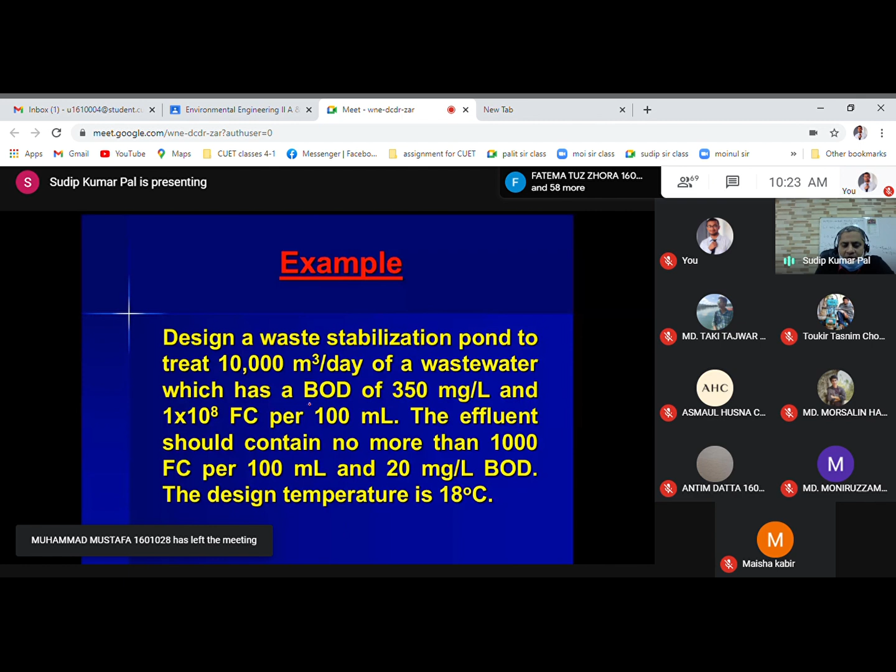And BOD removal is coming as 56%. So we are doing this exercise based on the given data. We are not thinking about the practical aspects, like how many ponds we will design, whether it will be in series or parallel. At this moment in undergraduate study, that may not be necessary.

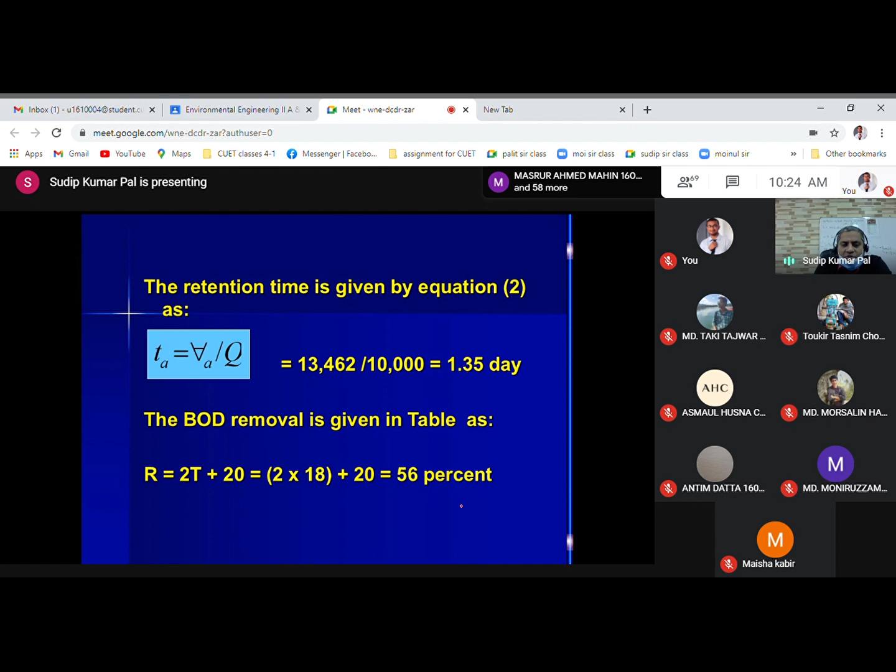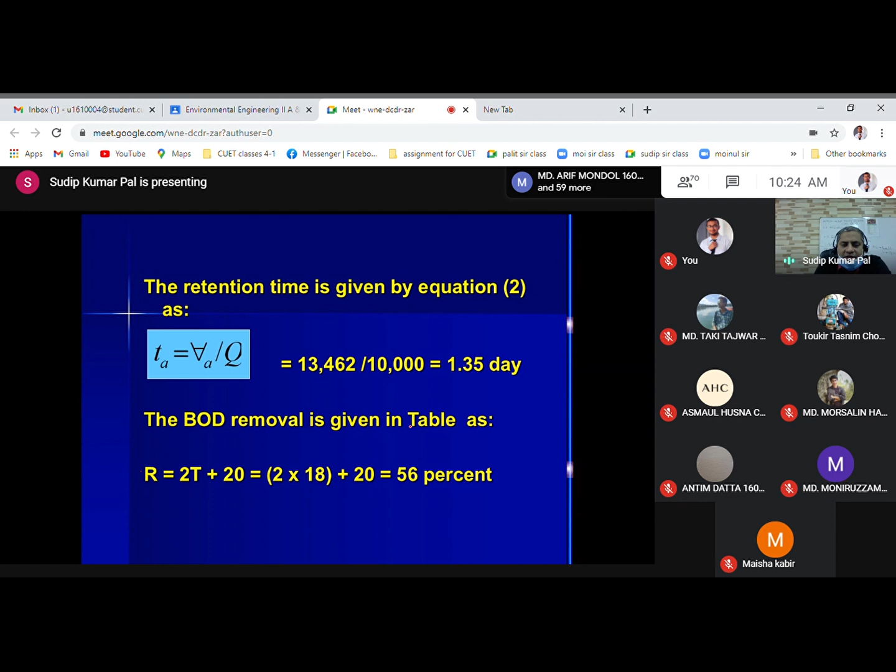We also discussed in class how to solve these issues if the loading rate is high. So as you can see, 56% removal we are expecting theoretically from the pond, and practically, obviously, after construction we have to measure. This is in the design phase, so this 56% is based on the temperature. We assume 18 degrees, the empirical equation proposed by the scientist for designing the waste stabilization pond. So that is the anaerobic pond.

It's nothing really difficult. And for facultative, we move into the second phase. Facultative is basically based on the surface loading. This is also equally based on the temperature. As you can see, the temperature was 18, so based on that, the loading rate is 216 kg per hectare per day.

And this is the equation, as you can see, 10 Li, but as I said, this Li will be whatever is remaining. So 56% is the removal efficiency, then 0.44 is remaining. So this is after anaerobic treatment. So the remaining portion is 0.44 into 350, and Q will be the same as before, 10,000, divided by...

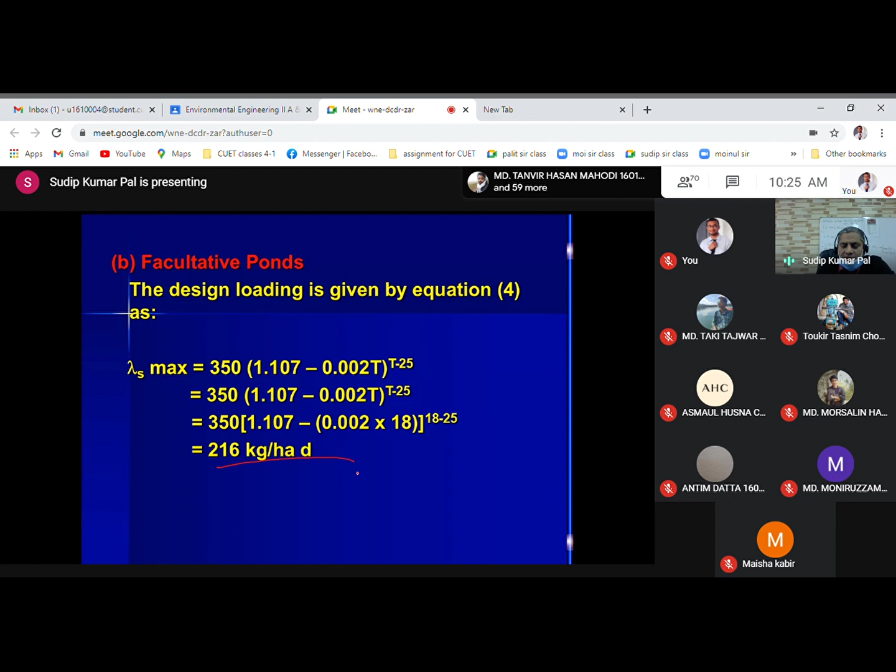Lambda S, as you can see, is based on temperature. You put in the temperature and then calculate this, the surface loading rate. And then from there you can calculate the surface area. And you can see this is a huge surface area, 71,300 square meters.

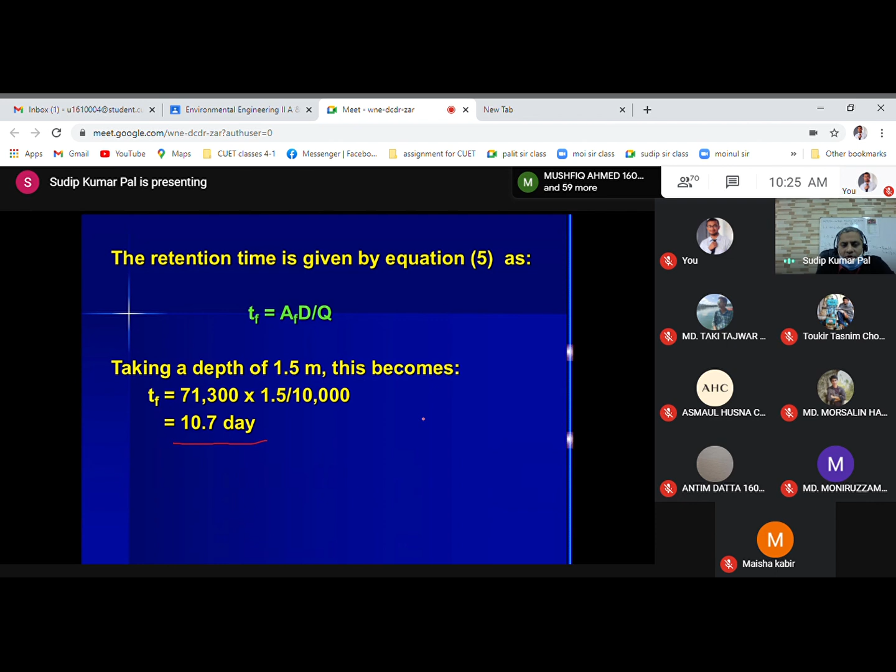And the retention time is almost 10.7 days, or 11 days roughly, you can say, if you assume the depth is 1.5 meters. If you assume even 1 meter, or higher, a smaller or larger retention time will come up.

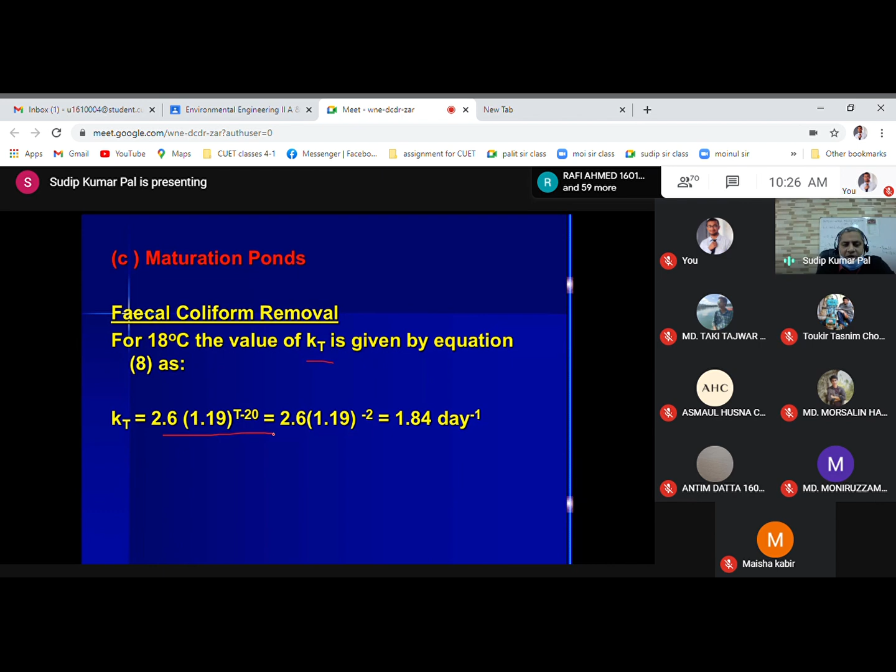Then coming into the maturation pond, as you can see, the maturation pond comes next. And for the maturation pond, obviously KT is important, and KT is also dependent on temperature, as we discussed in the last class. So you calculate the reaction rate, and then there are basically 3 ponds you have. Then what we are basically trying here, we have given 10 to the power 8 as the fecal coliform concentration.

So this is coming from the given data. We have one anaerobic pond, one facultative pond, and then a number of maturation ponds, which we assume as N. In the maturation pond, fecal coliform decay is exponential, that's why it is to the power N, where N is the number of ponds. It can be 1, 2, or 3, depending on your trial, or you can solve the mathematics by setting up the equation and calculating how many are needed.

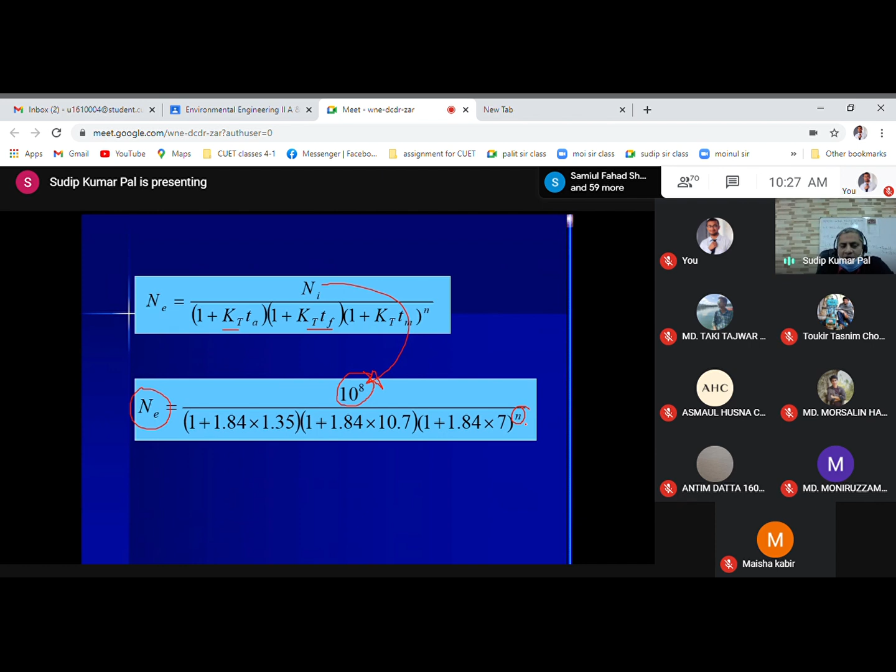Why do we put N? Because we have a requirement: the NE value should be 10 to the power 3 or less. So we can put 10 to the power 3 and calculate the value of N, or we can give a trial.

If we assume the maturation pond, because we already calculated 1.35 days and 10.7 days, there are a few unknowns here: one is the retention time in the maturation pond, and one is the number of maturation ponds we are going to design. So we assume Tm equal to 7. The typical retention time in a maturation pond varies from 7 days to 30 days, depending on the target we are achieving. So it's just an assumption and trial and error, assuming 7 days.

Assume one pond: one anaerobic, then one facultative, then one maturation. With N value equal to 1, the result is 99,957, which is still greater than 1,000, the requirement set by regulation before discharge. If we go to 2 ponds, we get 7,201, still greater than 1,000. If we give 3 ponds, then it is less than 1,000 FC. That means 3 maturation ponds are necessary.

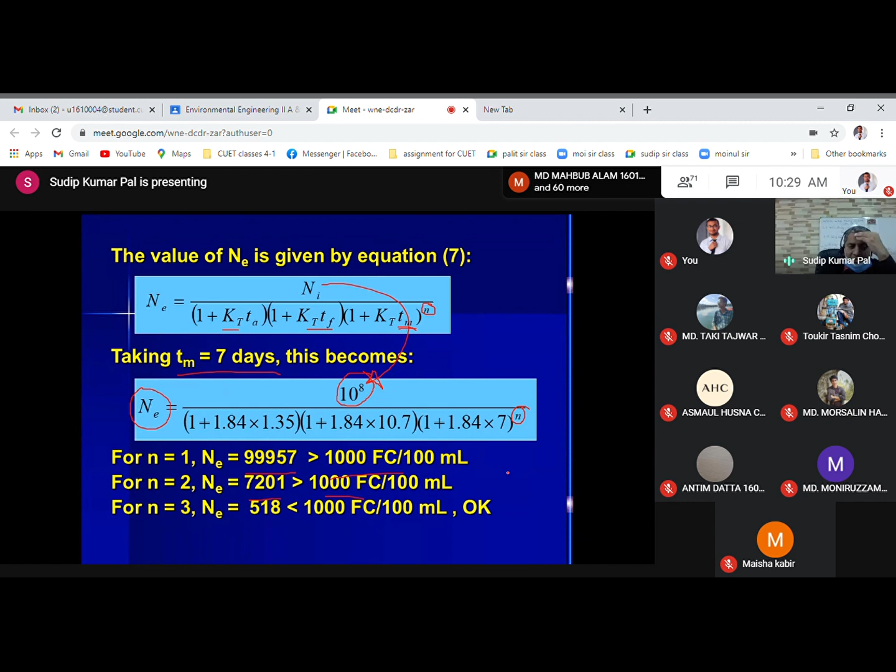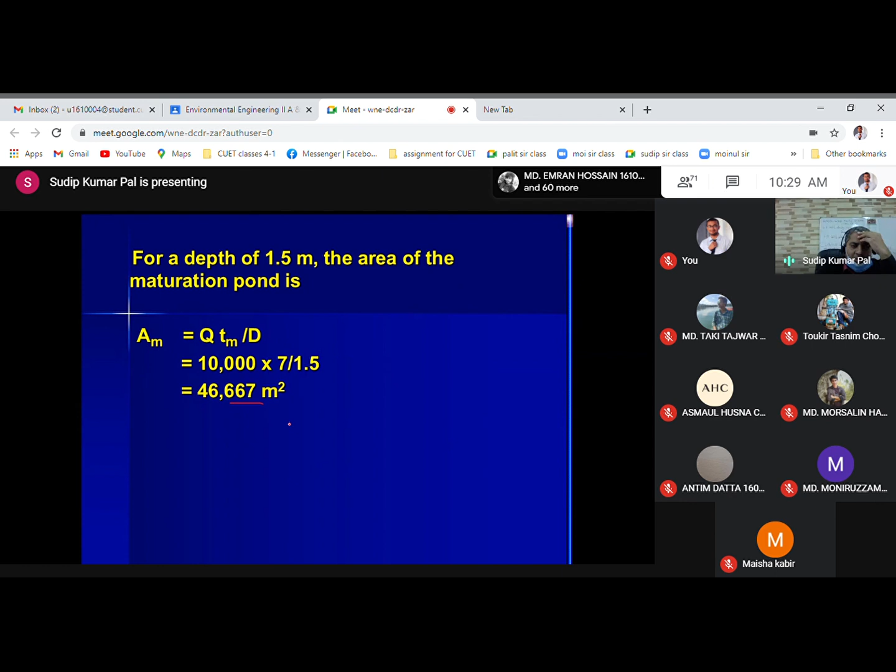Once you come to this decision, you can calculate the area of the maturation pond, because you know the retention time is 7 days, and the depth of the pond is basically 1 to 2 meters. Assuming an average of 1.5 meters, the result is 46,667 square meters of maturation pond necessary.

Then we have to do a final check. We now confirm that after one anaerobic, one facultative pond, if we put 3 maturation ponds, then we are able to reduce the BOD and fecal coliform load within the required range.

After the anaerobic pond, BOD removal gives a concentration of 154 milligram per liter, but our guideline requires BOD concentration to be less than 20. We have to assume this and check whether after anaerobic, facultative, and maturation ponds we can get there. The anaerobic pond gives 56% efficiency, but it's still 154. Then we calculate how much we can remove from the facultative and the 3 maturation ponds we designed, using K1 as the rate coefficient since the temperature is not 20 degrees but 18 degrees, so we need to make the correction.

So 0.3 into 1.05 was the theta value, if you remember from the last class. Theta is 1.05, 0.3 comes from the temperature data, and T is 18. For 20 degrees it is 0.3; if it is not 20 degrees, then it's 0.3 into theta to the power T minus 20. With T equal to 18, this comes out as 0.272 per day.

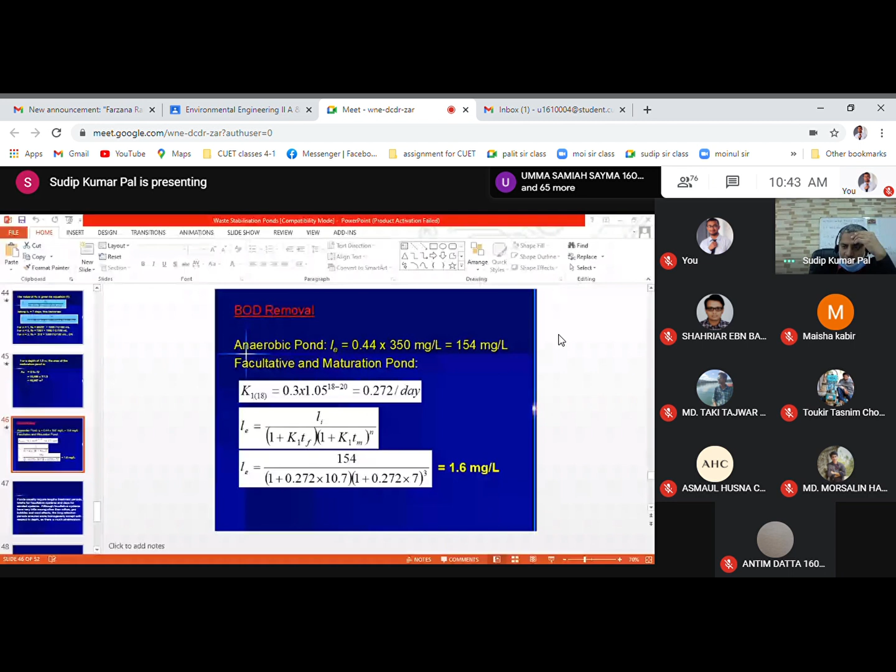So what do you feel are the disadvantages of having this pond system? After solving this exercise, what do you feel? What sort of disadvantages does this pond system have? Sir, it needs a huge space and lots of time.

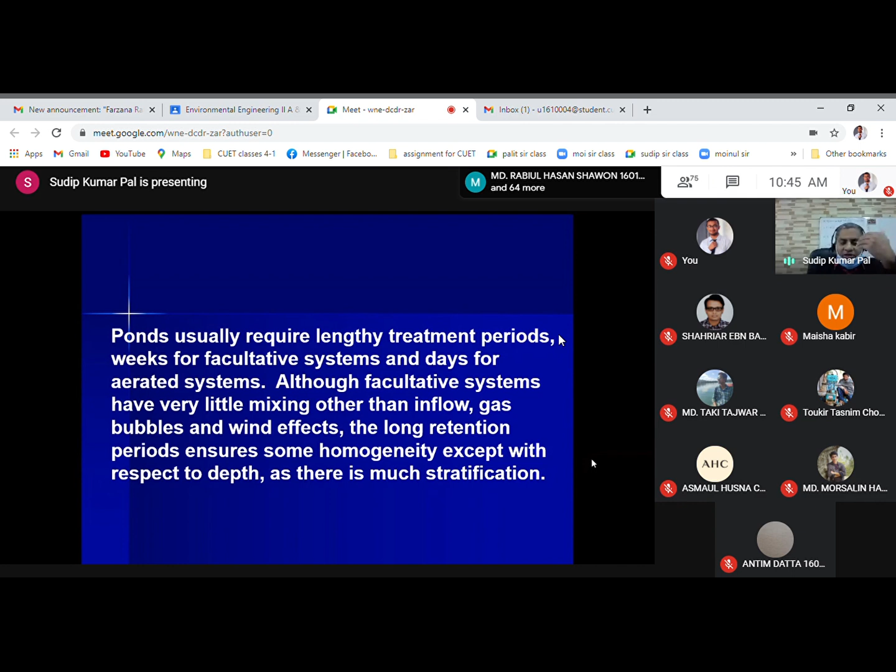As in any mixed system, the contents have the same concentration as the overflow. This means that the organism in the pond continuously experience a low level of substrate to feed on, which slows down the treatment considerably. It varies from one pond to another because it depends on the bacteria, and bacteria needs food.

If organic matter concentration goes down, that means BOD goes down. And if BOD goes down, that means there is not enough food for your bacteria to survive. So sometimes without food, bacteria cannot grow.

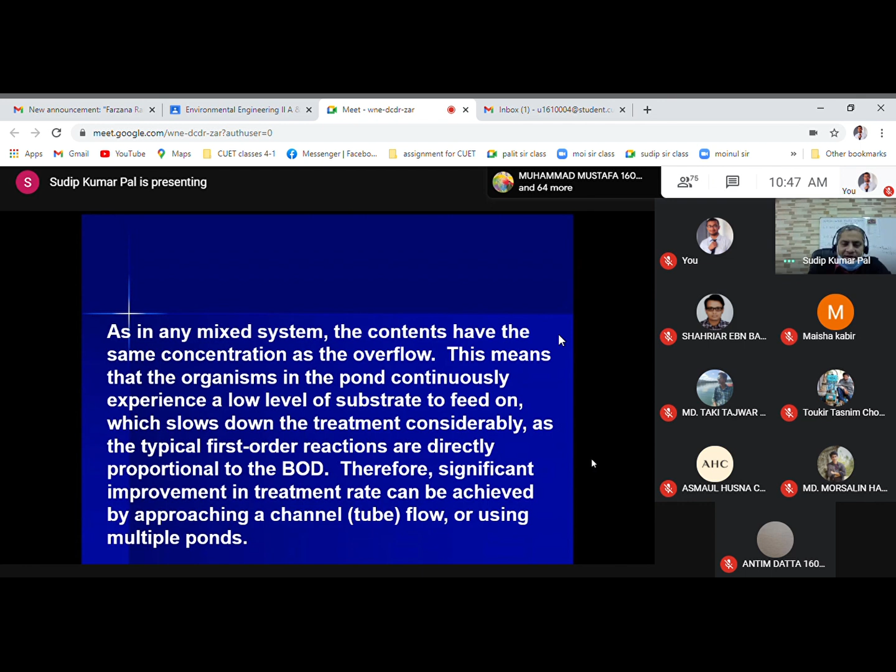It's difficult because after anaerobic, mostly coming into the facultative stage, and after facultative, there is less amount of substrate or organic matter or BOD. So researchers thought of using multiple ponds or using some sort of aeration, reducing the land area availability. They're thinking of what can be done if we want faster degradation, which means we have to balance the mass of food supply as well as bacteria.

So it's a kind of mixing your old sewage with fresh sewage continuously. So some of the young bacteria, some of the old bacteria get mixed together.

So the idea is putting it into one container, for example, and giving oxygen mechanically will help much faster degradation, and it can drastically reduce the time required by the pond system as well as the land area availability. But this requires a more skilled way to treat the wastewater with the necessary quality, meaning it's a more skilled type of treatment.

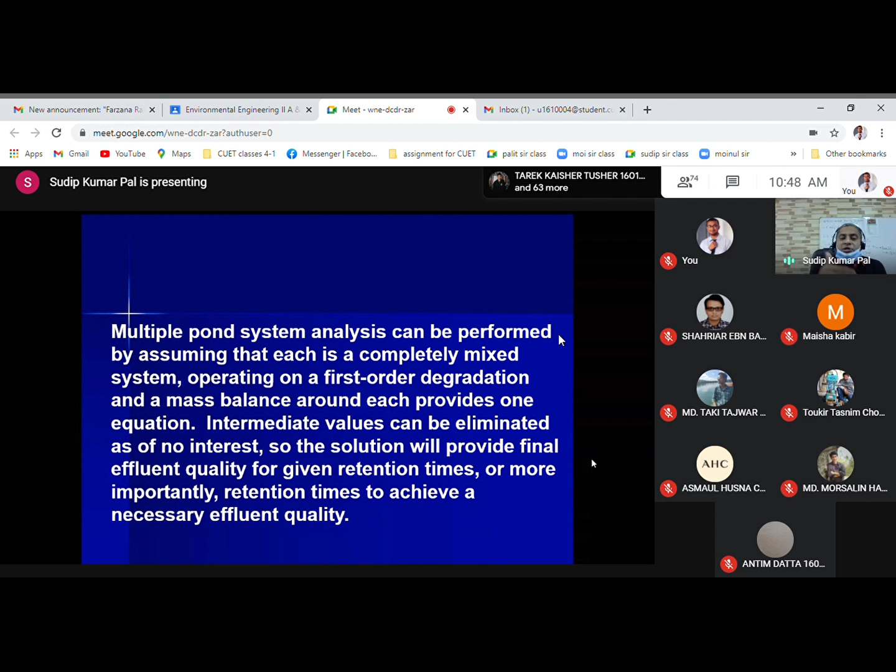It's natural, but still semi-natural, I should say, because it's more mechanized. The treatment is natural, but it needs a lot of input from skilled people and machinery, a mechanical way of treating, but with less retention time, faster degradation, and less requirement of land area. This is the next type of biological wastewater treatment, now very popular in developed as well as developing countries, because we also face problems designing pond systems in sewage treatment plants.

Even in Dhaka and Chittagong, the pond system requires a lot of land area, which really hinders the design. So in that case, they try to put the activated sludge process. As you can see, this means sludge - this means that we try to activate food or organic matter in the tank system. We are not going to design the activated sludge process because that is not the scope of this syllabus, but you should know what advancement is being made and what is coming next.

We have to really focus more on activated sludge than WSP nowadays because of land availability. But still, the pond system, in terms of operational maintenance and construction, is the cheapest option possible to naturally clean wastewater.

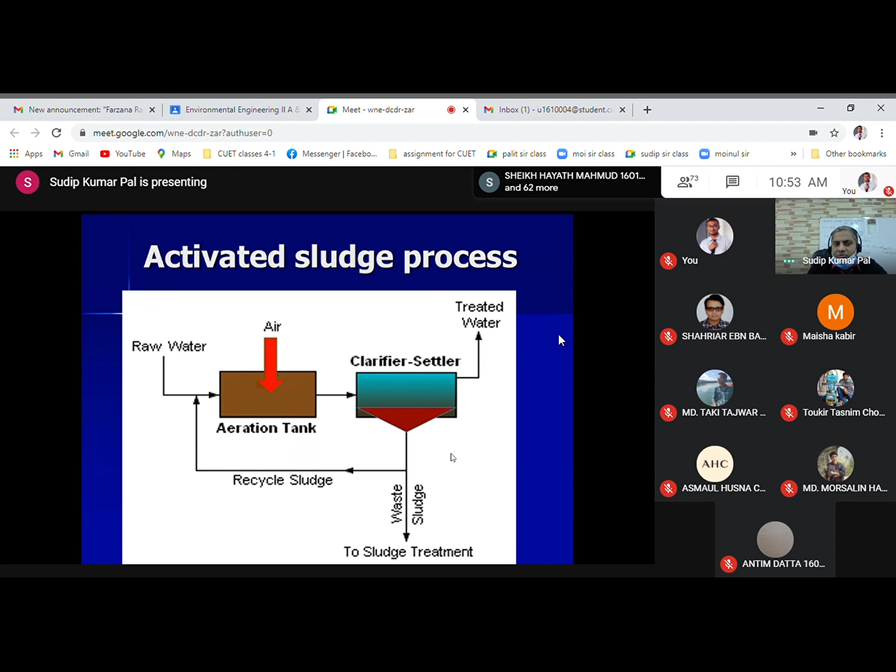So this is Q, and then this is coming as QW, underflow. This is a mixing of old sludge and new sludge. That means there are different sludges, different foods, different bacteria - that is basically the concept. So this recycle, raw wastewater mixing together, few dilution, few matured bacteria, few old bacteria, few young bacteria. So all three types of bacteria, different types of food coming here in presence of air, the faster degradation is happening. That is called activated sludge. This means you try to keep sludge activated as many cycles as possible for faster degradation. Then you take sludge out from the system, and you take treated water out from the system. So that is basically the philosophy of activated sludge.

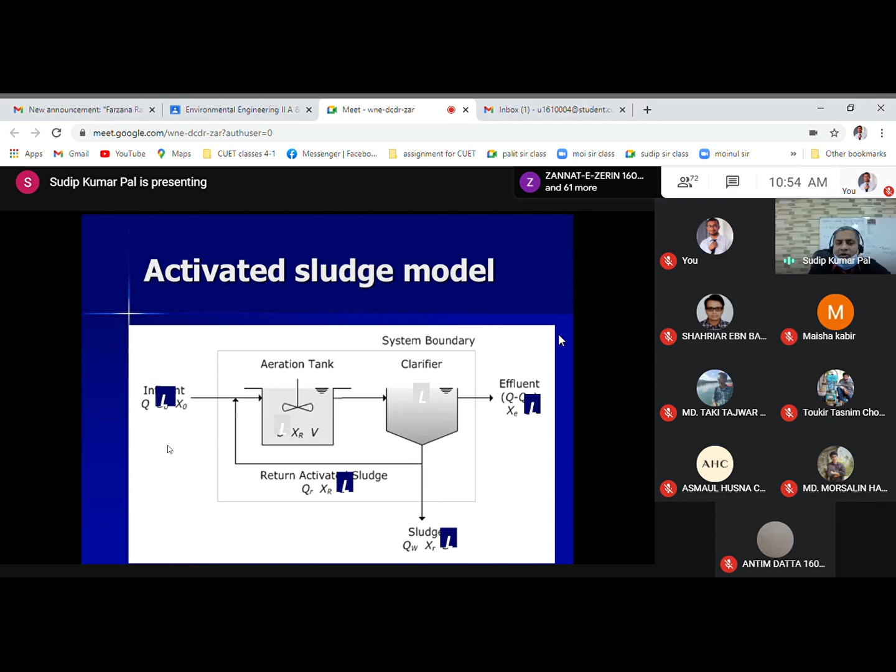There is a little bit more elaborative example slide. As you can see, Q and X0, this is the concentration and flow - you don't need to think about that. Coming as aeration, you give mechanical diffusion, goes to the clarifier, sludge is going out from the system, and this is called return activated sludge. Few sludge we send back to the system, as I said, to make relatively young, matured, and old bacteria for faster degradation. So this is the system boundary - a control system where we control the airflow, we control the concentration, we control the design flow Q. Everything is controlled in your hand in the design, and then you produce the faster degradation.

And then this is a kind of removal efficiency. As you can see, in the primary clarifier, the primary target is suspended solids 50 to 80%, BOD 20 to 40%, but 20 to 40 is very relatively high, so it's not possible - up to 30%. Phosphate, nitrate is very low in primary. E. coli removal is even lower, 1 log. E. coli removal is much faster in the tertiary, even a little bit moderate in the secondary, but secondary you can see 70 to 90% BOD we remove. So secondary is primarily for BOD, and SS is primarily for primary, and phosphate and nitrate is also possible to remove in tertiary, moderate in secondary, but E. coli requires tertiary. So that is the typical removal efficiency we achieve in the activated sludge system.

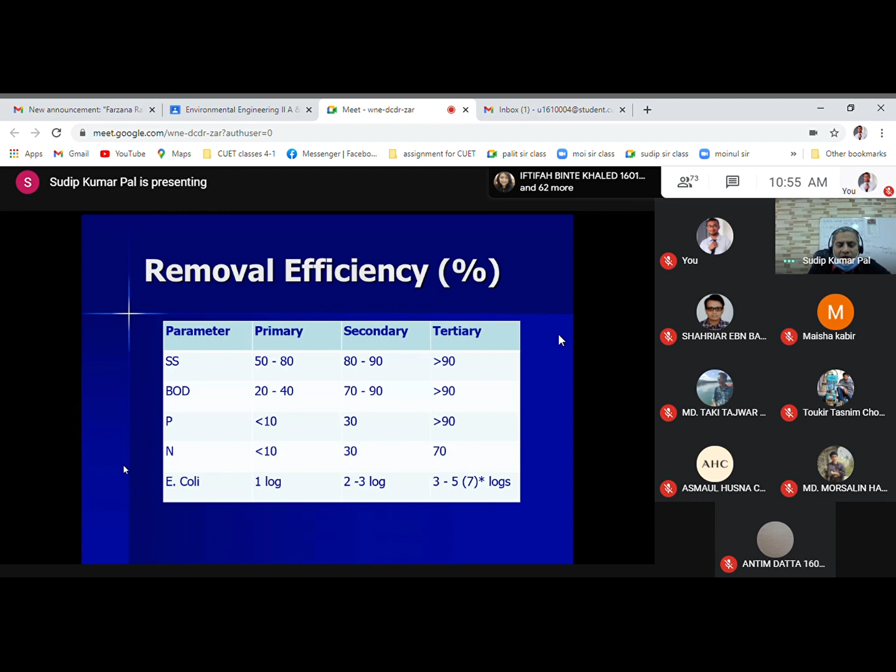So if I just stop this slide now, just to take you to another very quick slide - let me show you in 10-15 minutes. So just to give me time, that is basically what we discuss at the master's level. So I think I should have this slide here.

Okay, so I'll just show you the system dynamics, which is much more complicated than the system we discussed. So can you see the slide?

Is the slide visible to you? No, sir. Can you see now? Yes, sir. See now.

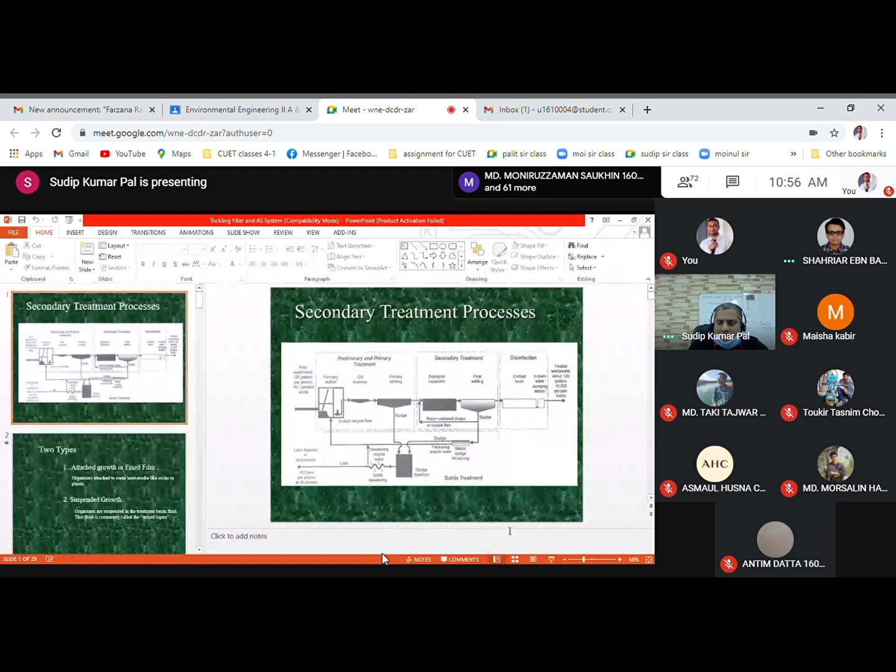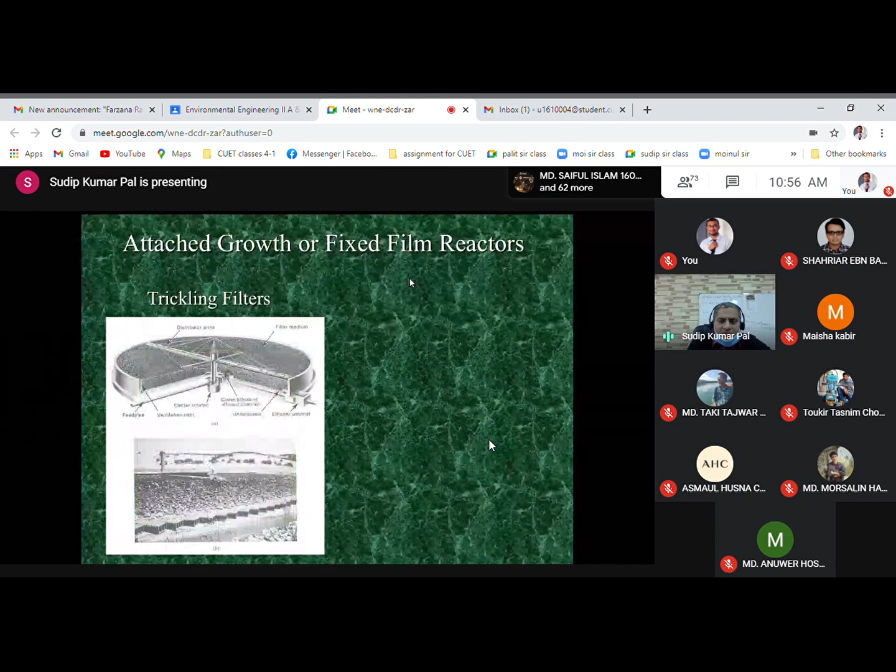Okay, so this is the total slide. This is under the suspended growth system - we call it suspended growth system organism. That is under the WSP as well as the activated sludge system, and attached growth system we'll discuss later. We have in the syllabus the fixed film system, so we'll be discussing that in the next class. Attached growth system, trickling filter, we'll discuss in more detail, so we'll just skip it at this moment.

So I have another slide, a typical slide for undergraduate, so I'll just show you this - I'm taking it from the master's level course. So this is the activated sludge, basically what is happening, how it's coming from the primary clarifier.

Then you can see that the air is imposed through the air diffuser, so this sludge is always in a mixing mood, something like that. More bubble you can see, more flotation, and then it's coming into the settling tank. In the settling tank, more sludge, or the mixture of sludge and liquid, is basically on the bottom, and relatively clear water is at the top, and this clear water goes out for chlorination or disinfection or maybe for discharge. This is pumped from underneath, and this pump has two components - sometimes we give it back to the sludge digestion system, and another part goes as return activated sludge back to this chamber. So it's just mixing of fresh sludge with other sludge as necessary.

So the design parameter used here is FM - don't confuse this FM with fineness modulus. This is basically food to microorganism ratio. F is the food, M is the microorganism, the bacteria, and food is BOD, as you know, or organic matter basically - so food is organic matter, but we measure it in terms of BOD. And M is the volatile suspended solid concentration, where only microbial activities are happening. So this is called the microorganism, or sometimes we call it MLSS, mixed liquor suspended solid.

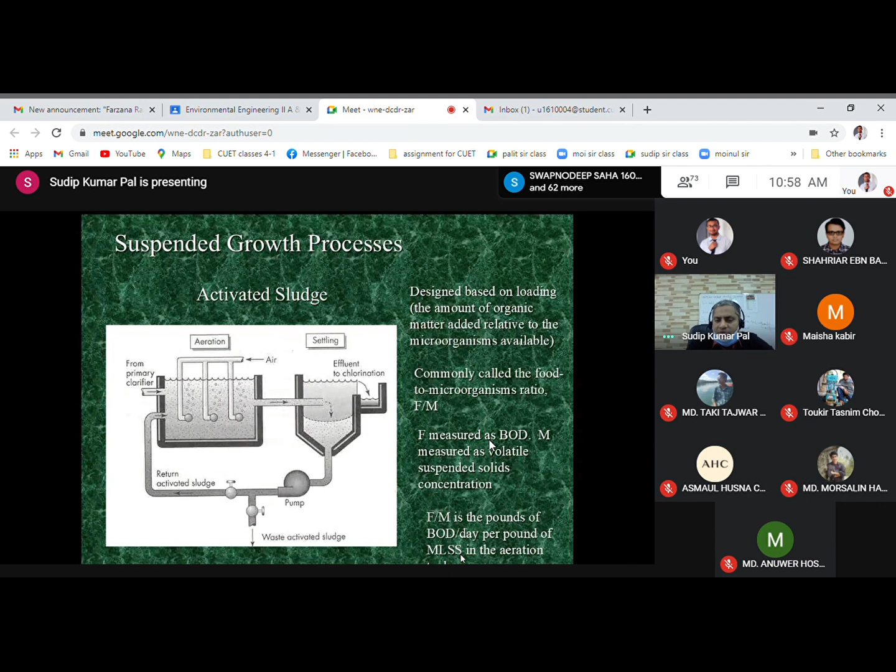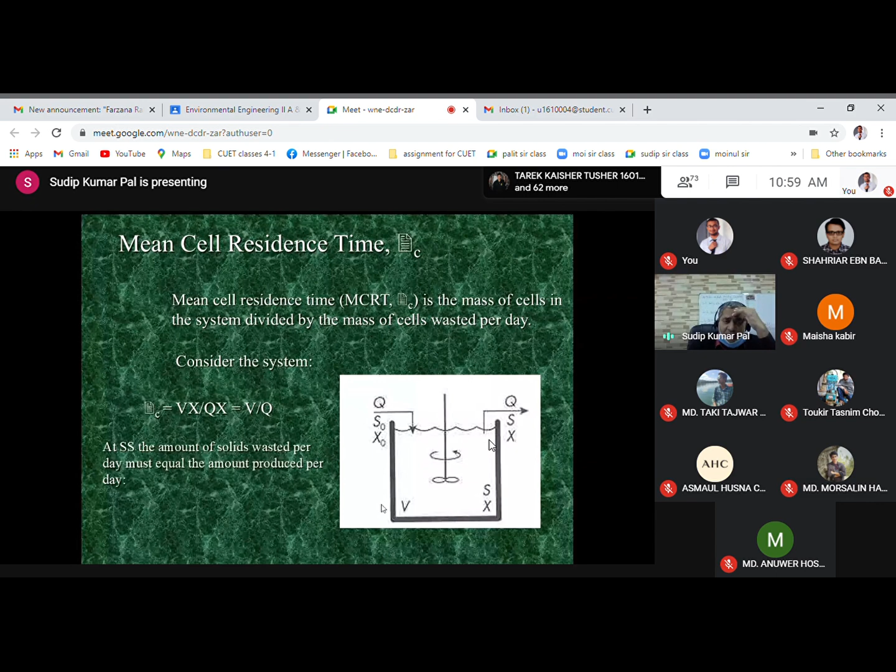MLSS. So this is really a difficult thing. There are a lot of equations about how to stabilize this. There is a model available, but there are more technical aspects involved. As you can see, these are quite difficult equations, but it's not that difficult.

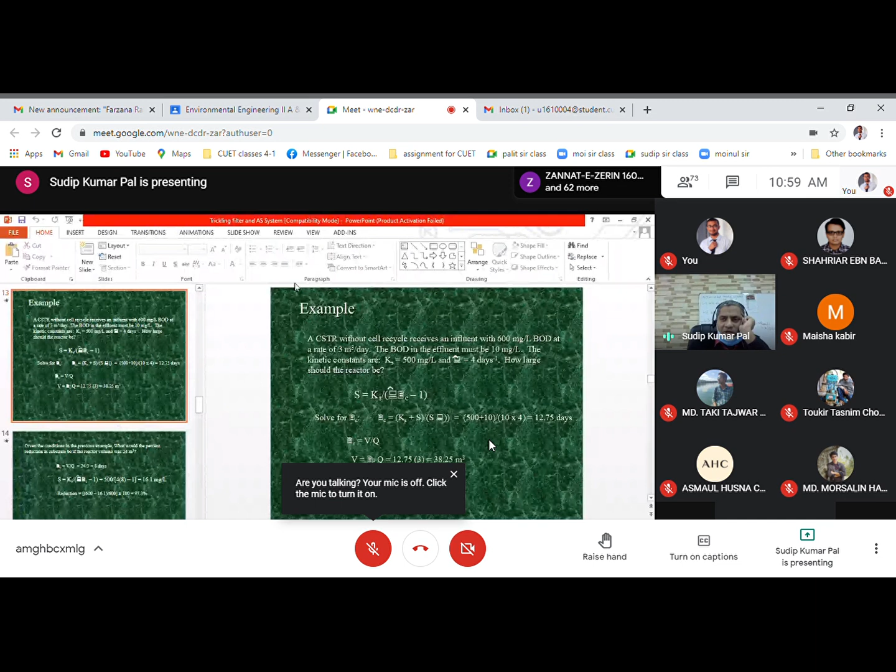We need to learn this first before becoming expert in the activated sludge system. Activated sludge is very popular nowadays in the design of secondary wastewater treatment, because you can significantly reduce the land area requirement, unlike natural systems where things are not under your control. Nature controls itself.

But if we try to control things ourselves, we design a system where we control the oxygen supply, the microorganism supply, and the food supply. In that case, it's much more technical—I design it, I know how to control it and where. So that system is what we call the activated sludge system.